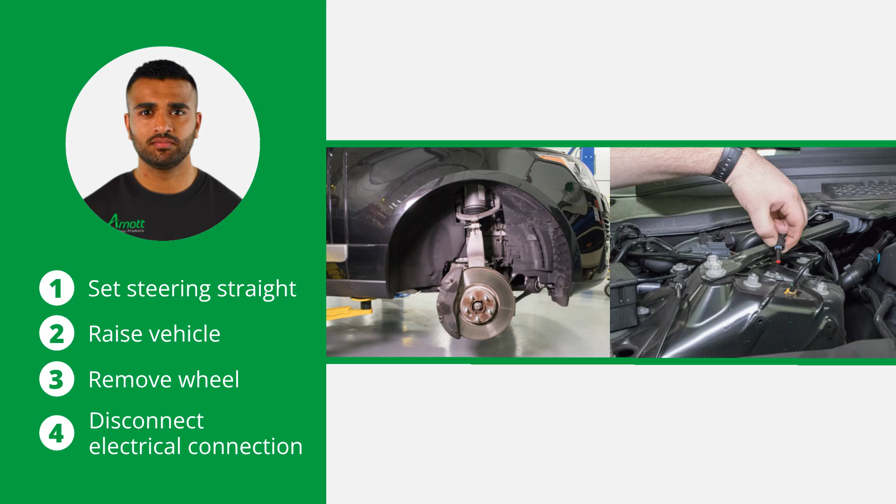Loosen and remove the airline from the top of the strut and remove the airline fitting. To do so, spread the collet open and the remaining fitting will slide off the air hose. Loosen and remove the top mounting nuts. Now loosen and remove the sensor wire and the brake line bracket.

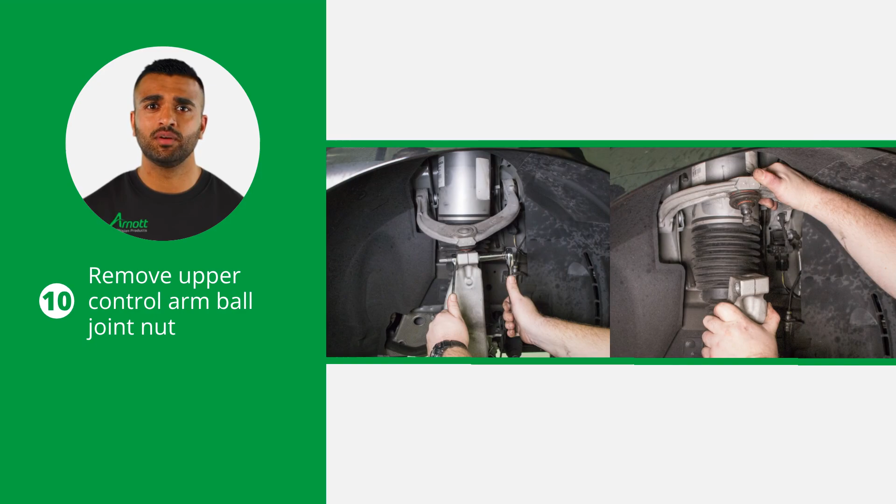Now locate and remove the upper control arm ball joint nut. Separate the ball joint from the spindle assembly. Now loosen and remove the lower strut mounting bolt. Remove the sensor wire bracket and separate the sway bar end link from the lower strut clevis.

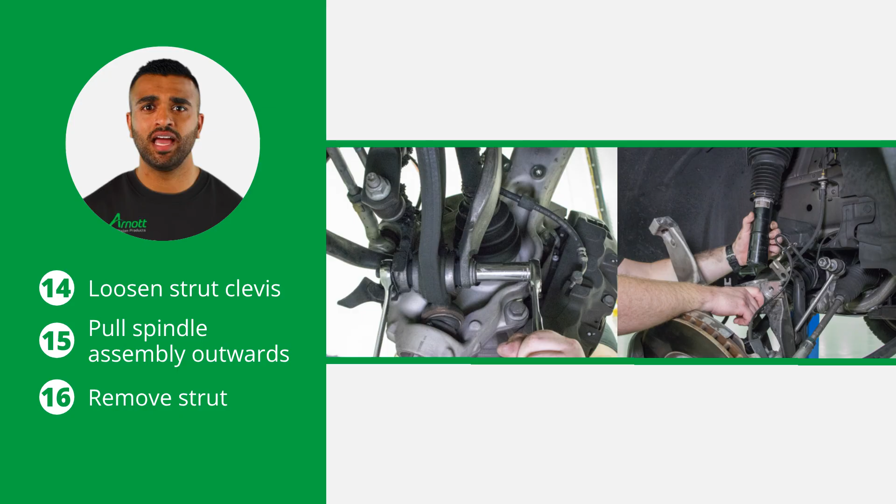Next, loosen the strut clevis and pull the spindle assembly outward. You can now remove the strut to complete the removal process. Do not remove the air fitting from the air strut. Doing so may cause damage and void the warranty. Remove the white shipping pin from the new air fitting and insert the airline until fully seated.

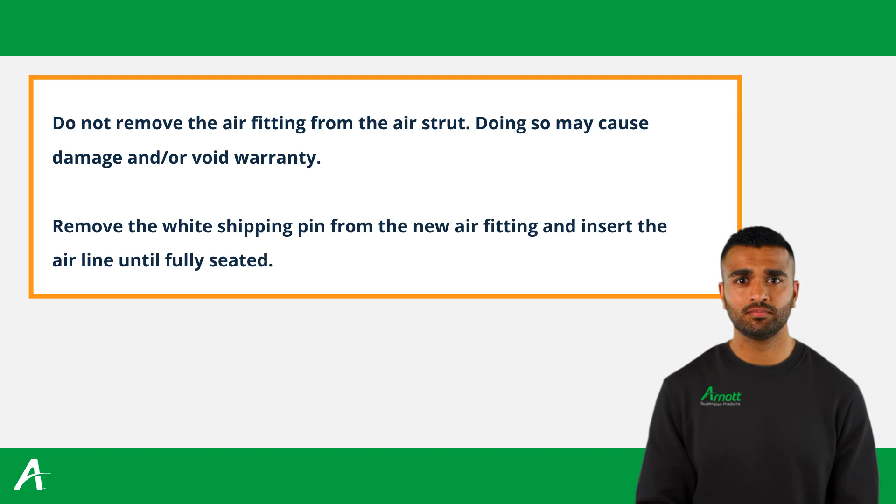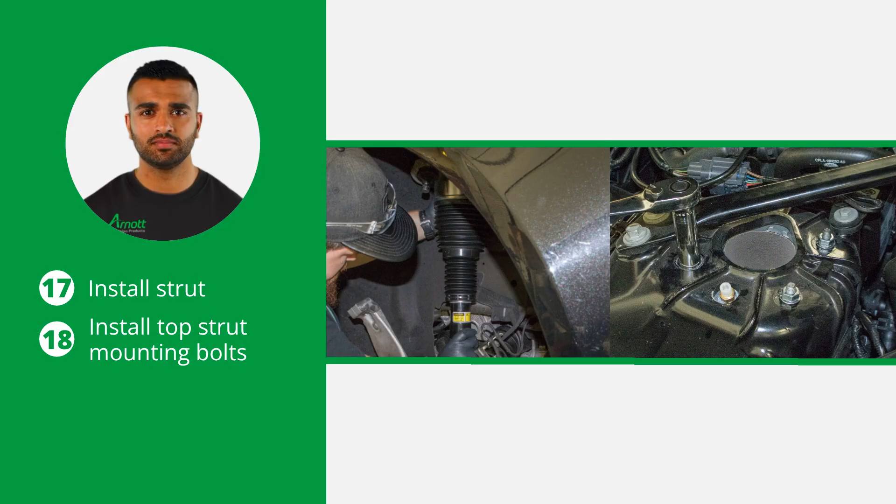Install the strut into the vehicle and install the 4 top strut mounting bolts. Make sure to tighten all nuts and bolts to the vehicle manufacturer's specifications during the installation process. Now, install the lower strut mounting bolts and reinstall the upper control arm to the spindle assembly.

Reinstall the sensor wire bracket and reattach the end link to the lower strut clevis. Retighten the strut clevis to the manufacturer's specifications. Now reinstall the sensor wire and brake line bracket.

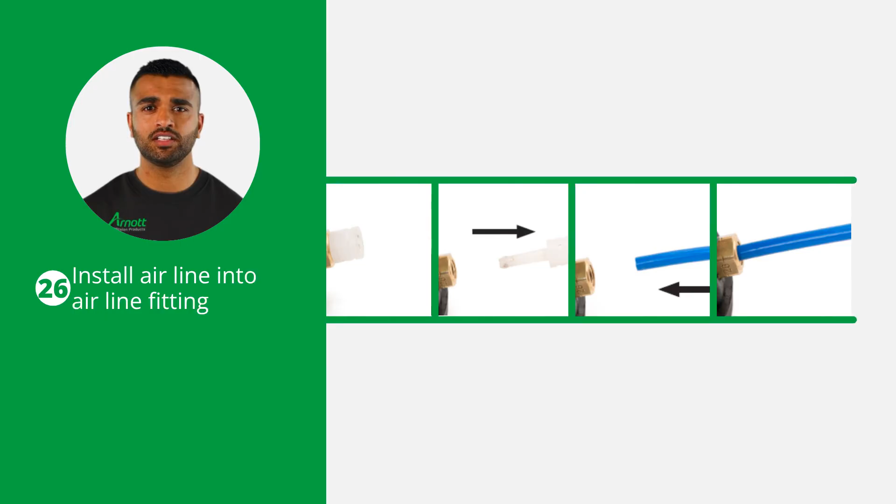Install the airline into the airline fitting. Do so by removing and disposing of the white shipping pin. Then insert the airline into the fitting and press until it is firmly seated. With the airline inserted, pull the airline outward to lock and ensure a secure connection.

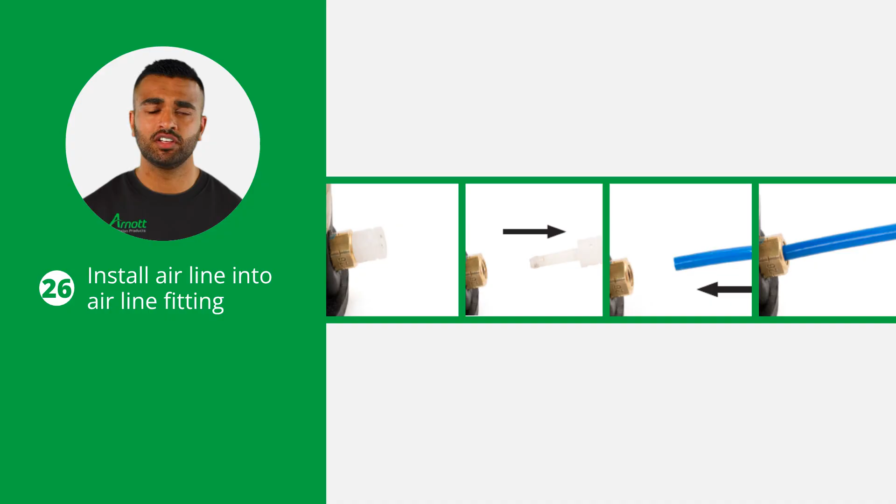Now, reinstall the electrical connection, ensuring that the plug is oriented appropriately to the electrical terminals within the strut. Lastly, reinstall the wheel, which completes the installation.

Thank you for following our guide on installing the remanufactured front air struts for a Land Rover Range Rover L405. Proper installation ensures the longevity and performance of your vehicle's suspension system.